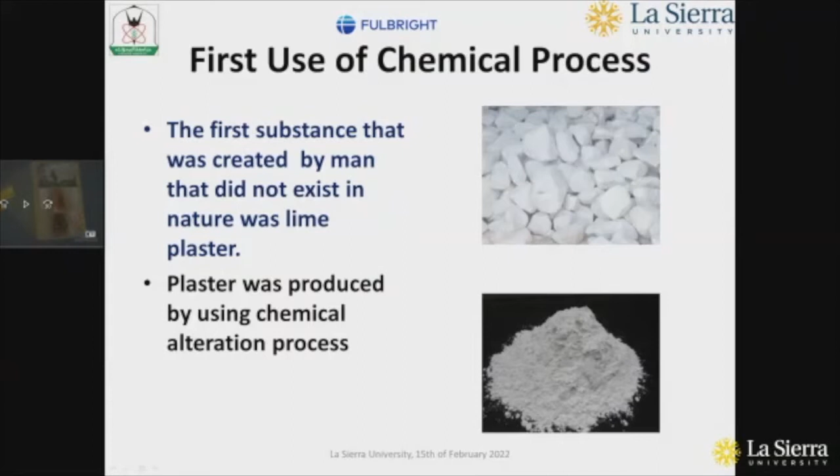We have limestone. Now, in order to transform limestone into lime plaster, this is really a complicated chemical process. So plaster was produced by using a chemical alteration process.

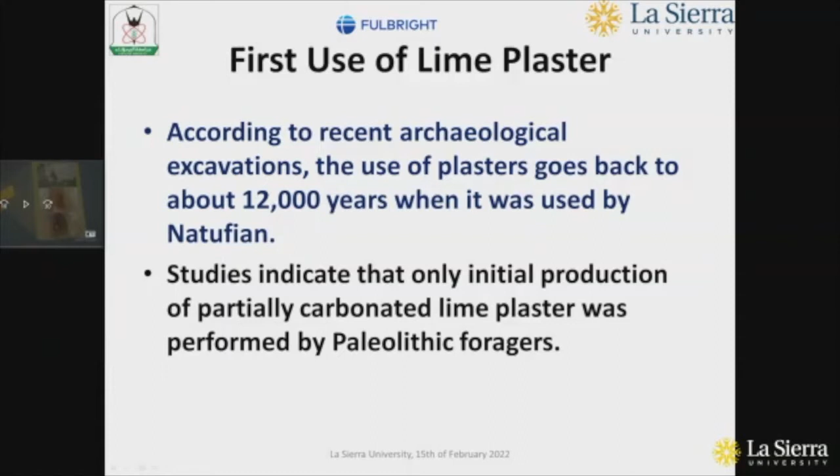So the first use of lime plaster, as reported by archaeologists, is about 12,000 years ago at some of the Natufian sites. But that was only initial, partial carbonation, not full lime plaster, on a very small scale. Now, the first large-scale lime plaster production and use was really at Ain Ghazal. Ain Ghazal is a site in Jordan.

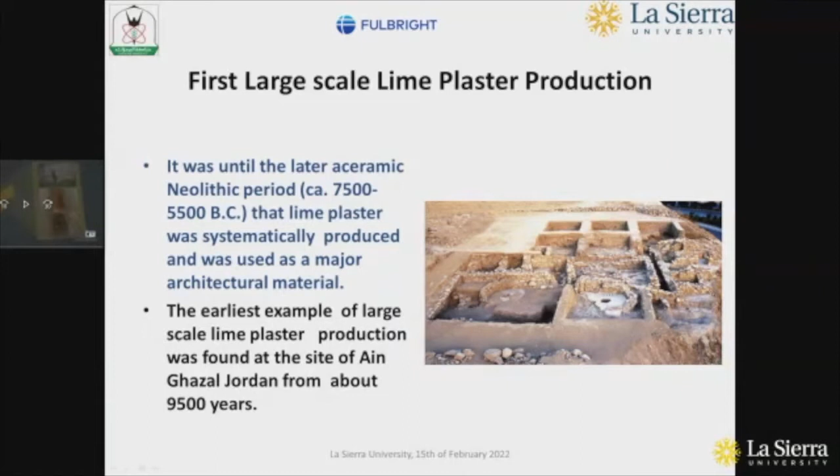So that site was extensively researched by a joint project between an American university, I think Whitman College with Gary Rollefson, and Yarmouk University under the leadership of Zeidan Kafafi. So that was about 9,000 years ago. The earliest example of large-scale lime plaster production was found at Ain Ghazal.

So they found plaster extensively used to cover floors and walls, as you will see here. So that large-scale production was not just confined to the use of plaster as an architectural material, but they used it to produce statues. Very unique statues, very famous in the world now. Ain Ghazal statues are being exhibited in different international museums like the Smithsonian Museum, the Louvre, and the Jordan Museum. We have a couple of them at Yarmouk University Museum.

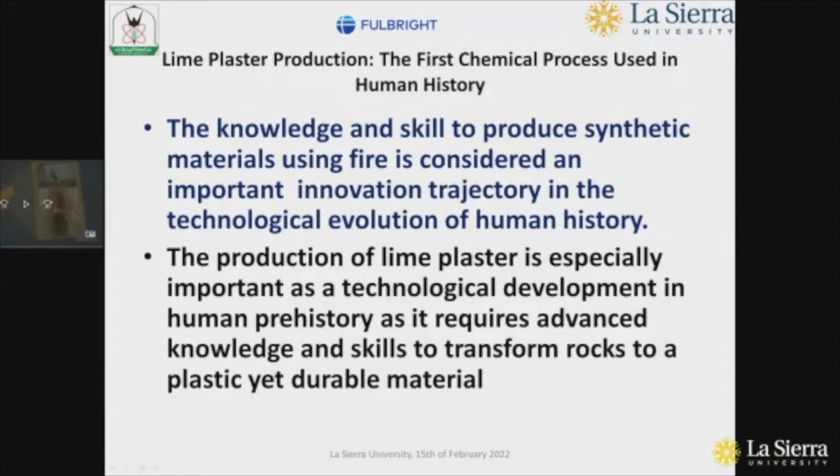So the production of lime plaster is especially important as a technological development in human prehistory. It requires advanced skills and knowledge of the nature of the materials and how you can alter and change the nature of the material by applying heat. This is what they did.

And they transform rocks to a plastic yet durable material to produce the statues. And if you just follow the chemistry of the lime production cycle, you know that these people were really advanced in their knowledge about the materials.

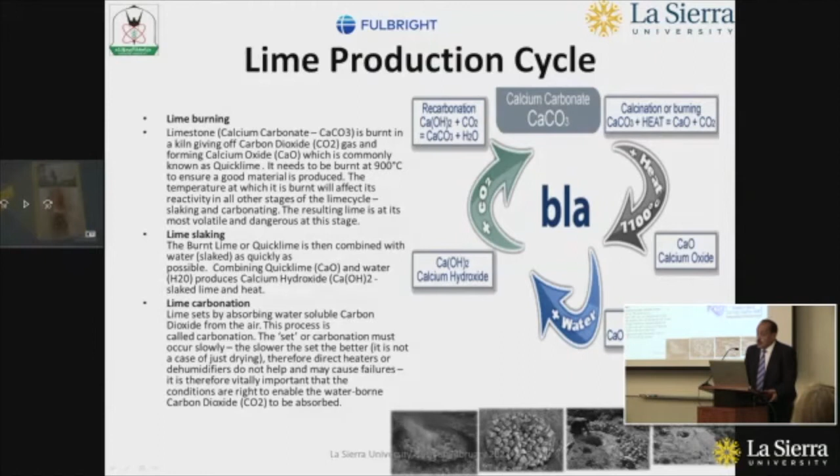So they knew that they have to decompose the calcium carbonate, which is the main chemical of the limestone, decompose it by applying heat to above 900 degrees centigrade to produce lime, calcium oxide. And when they added water to this calcium oxide, they produce what they call slaked lime, the body that they can really use to manipulate and shape.

Okay, but this also needs an extra step for setting up what we call the lime carbonation in order to come back to be a calcium carbonate again and achieve the durability. So it's a three-step process. They need to heat at a high temperature, decompose the calcium carbonate, and then add water. They know that there will be a reaction between water and lime to produce the calcium hydroxide, which is what you call the slaked lime.

And then they leave it to take CO2 from the atmosphere, from the air, in order to complete the cycle and come back to calcium carbonate. So you think that this happened 9,000 years ago at the site of Ain Ghazal. So you can imagine what level of knowledge these people had at that time.

The second innovation that I want to speak about is really what's considered now by many archaeologists and many scientists as the first industrial revolution. The first industrial revolution happened in Jordan. So what is this industrial revolution all about? It's about the transition from the Stone Age to the Metal Age.

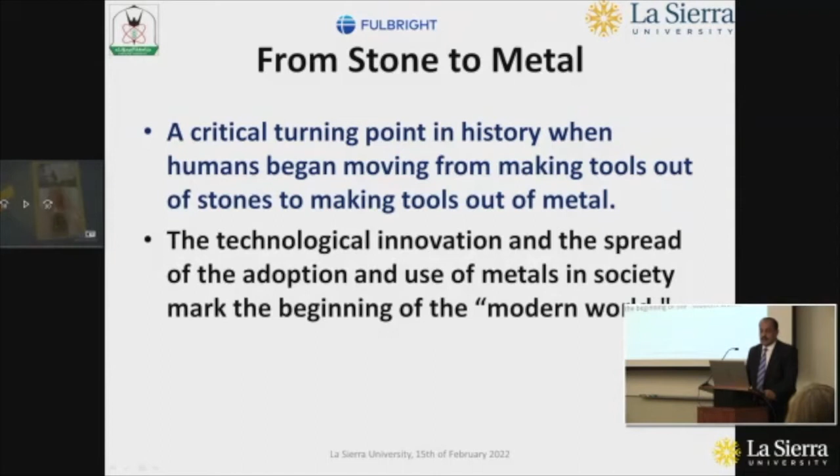What was the challenge? The challenge is that metal in general doesn't occur in nature as a free metal, except gold. Metals exist as compounds, what we call ore, which means the metal is combined with other elements. So that's totally different from the metal in terms of its chemical and mechanical properties. So the technological innovation was really to transform these ores into metals. We'll see how complicated, how sophisticated this process can be.

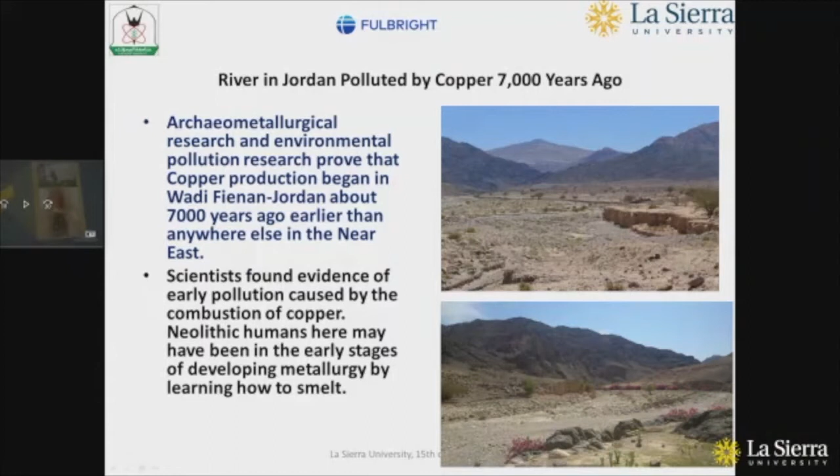Now, the earliest indication of production of copper, the first metal produced in the Metal Age, comes really from research done by a Canadian team from the University of Waterloo, who have been studying the area of Fienan in southern Jordan for about 25 years. And they discovered that this dry riverbed is contaminated with copper metal. And they used carbon-14 dates and other dating tools to estimate that this was about 7,000 years ago, at the very beginning of the Chalcolithic period, maybe even a little bit earlier.

So the scientists found this evidence of early pollution caused by combustion of copper. And we think it's an indication that copper was produced at Fienan, because although some small quantities of copper can exist in nature as native copper, these are very small, very tiny. Most copper is really man-produced by smelting from ores.

Although the name of copper, as we discussed with Doug the other day, is derived from the name of Cyprus, archaeologists believed until this discovery and other work, I will mention the research also done by other research teams who have been working in Fienan for over 30 years now, that the earliest evidence of copper smelting was from Mesopotamia. And they estimated that at about 6,000 years ago.

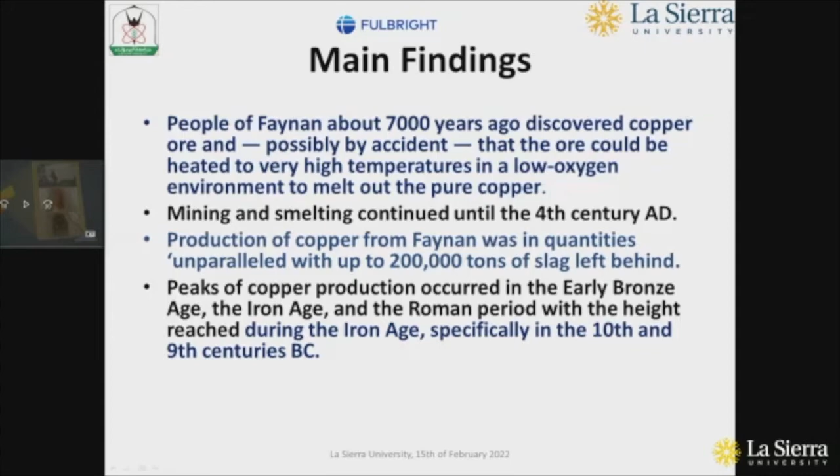And just to give a summary of what they have now, almost like a consensus on these facts, that people of Faynan about 7,000 years ago, earlier than anybody else, anywhere else, discovered copper ore, possibly by accident because of the colors. The ore could be heated to a very high temperature in a low oxygen environment to melt out pure copper. So mining and smelting continued uninterrupted until the 4th century AD. Of course, it reached some peaks during the early Bronze Age, Roman period, and particularly in the Iron Age, the 10th and 9th century BC.

Now, the indication of the scale of production of copper is really what was left behind, the slags, which are the byproduct of the smelting process. And people can really easily back calculate the amount of copper produced based on the slags. So we have slags, slag heaps, about 200,000 tons now at the site. You see the ore everywhere, the mines, and also later on in the Bronze Age, they discovered what they call a bronze factory, because they produced copper ingots and bronze at an industrial scale for export.

Just briefly to tell you what it takes to get copper from its ore. Copper ore to copper metal. This is not easy at all. This is a very sophisticated and complicated process. It's a multi-step process. We have at least 4 physical processes and at least 3 chemical processes in order to convert copper ore into copper.

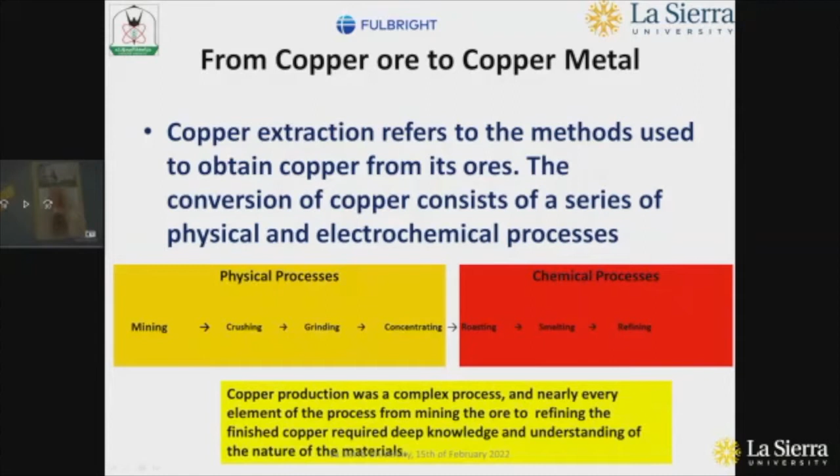They have to collect the ore from the mines. At the beginning, they can do what we call pit mining or surface mining, but later on they have to dig deep to get the ore, and then they have to do some sort of preparation by beneficiation and refining to get rid of as much gangue material and impurities as they can. A lot of it, because even the best grade of copper ore can contain not more than 10 to 15% of copper.

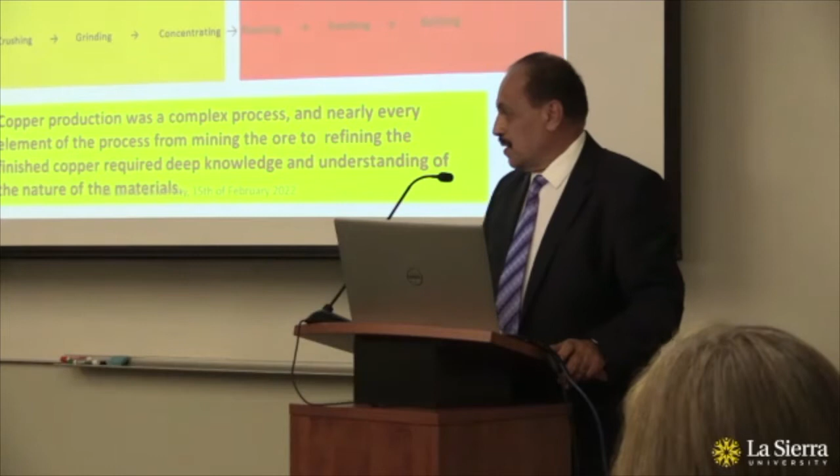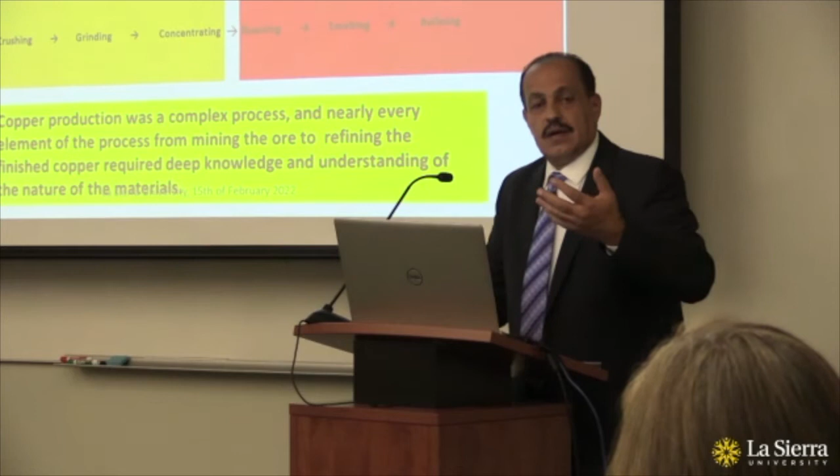But the most amazing thing is not really the physical processes or the chemical processes, especially the smelting. And people sometimes mix up smelting and melting. So melting is a very simple process of converting a solid substance into liquid. Smelting is something else. It's an electrochemical process. It's a reduction. You apply temperature, and you have to have a reducing agent in the atmosphere in order for this process to be completed.

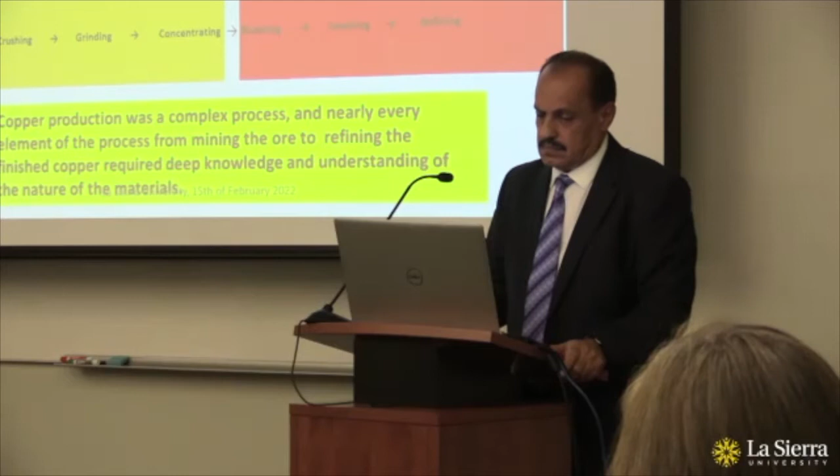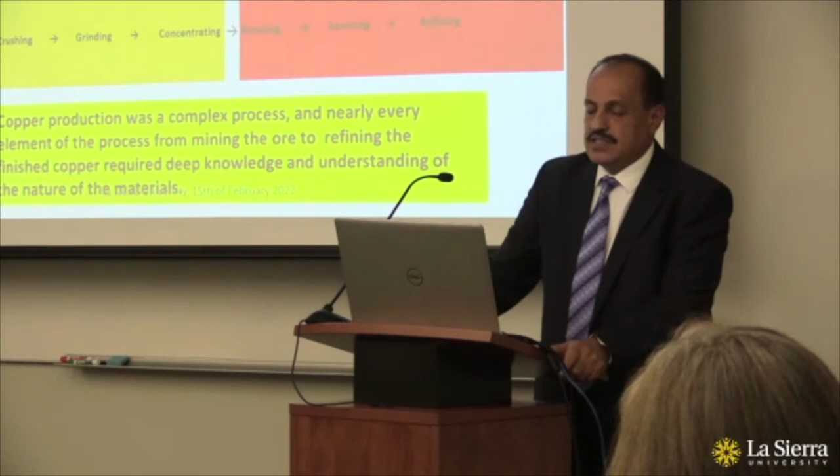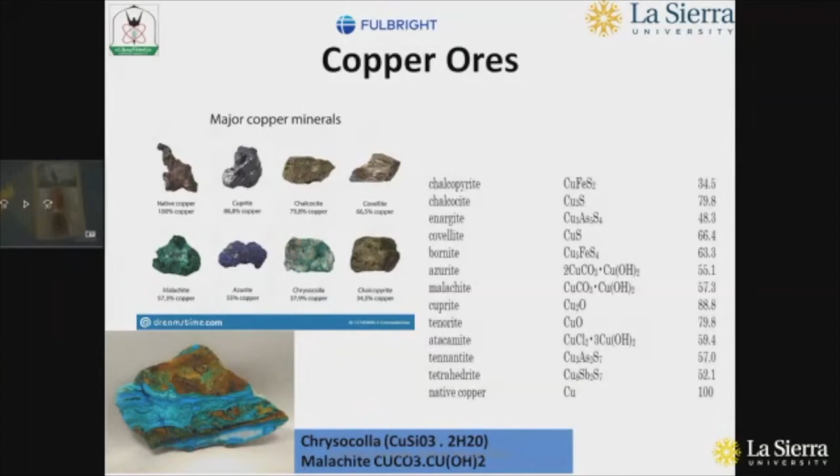So copper production was really a complex process. Nearly every element of the process, from mining the ore to refining the finished copper, required deep knowledge and understanding of the nature of the material. We'll just focus on the smelting. So copper exists in nature, as I mentioned, as copper ores, like these compounds. And in Faynan, the most predominant ore is chrysocolla, the copper silicates, and malachite, copper carbonate, with some chalcopyrite, which is the copper iron sulfide. That's very hard to work, really. Very hard to get metal copper from chalcopyrite, but they did it also.

So smelting is a chemical process. In order to extract copper from its ore, you need certain conditions, certain requirements. The first one is the very high temperature. And we'll talk about the temperature and how they control and manage the temperature. And then they also need to have a reducing atmosphere. And also, they need an extra, very sophisticated thing for purification. I will talk about that later.

So if you just look at the chemical equation, this is malachite. Under heat, in roasting, in an open pit, you can do this. So you get copper oxide. In order to take the oxygen out from the copper oxide, this is a very strong bond, you need a very high temperature, and you need a reducing agent, which is carbon or carbon monoxide. So this journey from ore to metal is a very sophisticated and very complicated one.

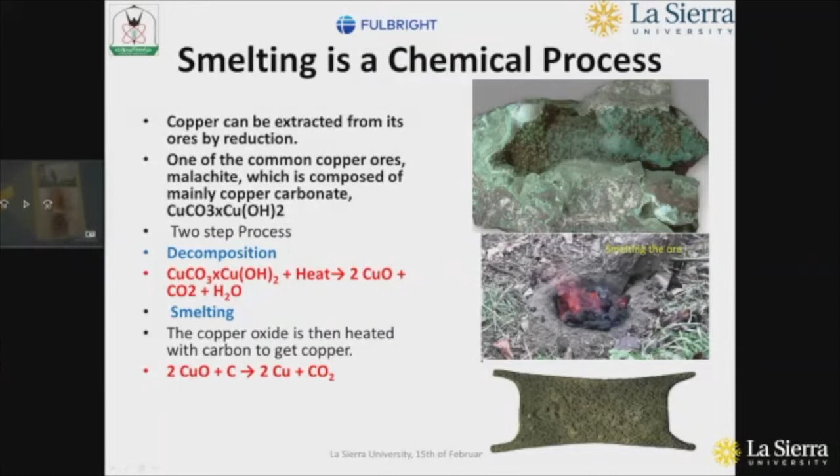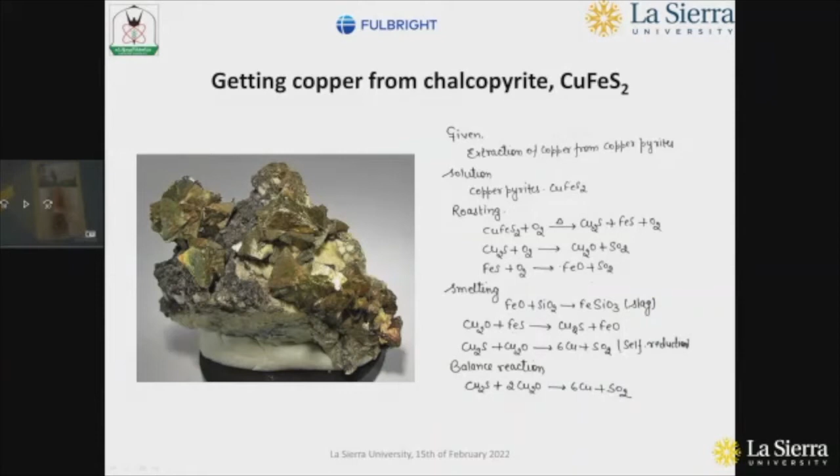If it is chalcopyrite, you go through a series of complicated chemical reactions before you can get copper. I'm not going into the chemistry of the reduction at this stage, but some people thought that smelting might have been discovered by accident, maybe began as a result of accidental cooking of metal ore in a campfire.

Is that an accepted argument? No way, because with that sort of fire, you cannot get the high temperature you need for the roasting and the smelting. And also in the presence of oxygen, even if you got a temperature of 2000, you end up with nothing because of the presence of oxygen. You need a reducing agent. You need a very saturated atmosphere of a reducing agent, in this case, the carbon.

So most probably, though it's not yet a fact, smelting was discovered for the first time in a pottery kiln. Because in a pottery kiln, temperature might get really high. And sometimes in some corners of that kiln, if you get an ore, you might get a localized reducing atmosphere.

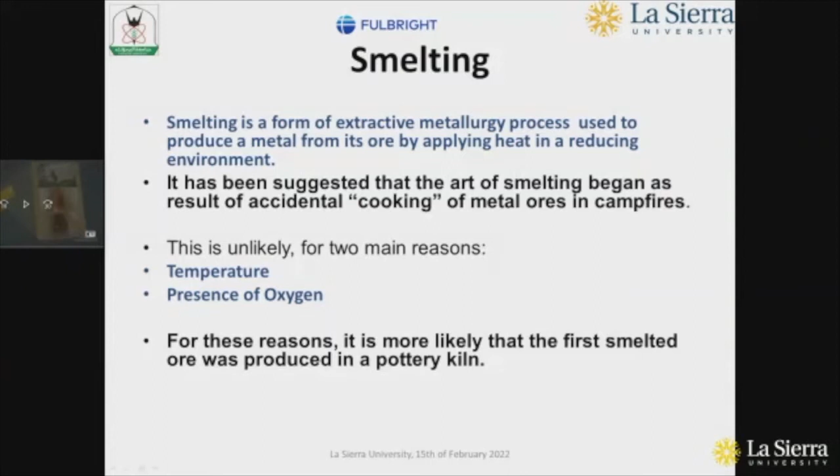So the requirement of smelting of copper is a very high temperature. You need at least 1200 degrees centigrade. That's above 2000 Fahrenheit. You need a chemical reducing agent to decompose the ore. And here they have to use a fuel that can give them the very hot temperature and the reducing agent at the same time. So they use charcoal instead of wood.

And you need what we call the flux. What's a flux? The fluxing is, for me, still puzzling how they really found out about this flux. Because if you do the reduction, and you have a furnace, temperature, reducing agent, everything, you end up with a very complicated mixture of molten copper, but with a lot of gangue material fused to the copper. And this cannot be separated. No way. So you got the copper, yes, but the copper is not obtainable in this case.

They really found, I don't know how, that if they added what they call a flux, which is an external substance, to the furnace or to the pit. At the beginning, they used a pit furnace. In this case, it's an iron oxide. It can react with the silica and form a molten phase that can be easily separated. So this is another chemical process.

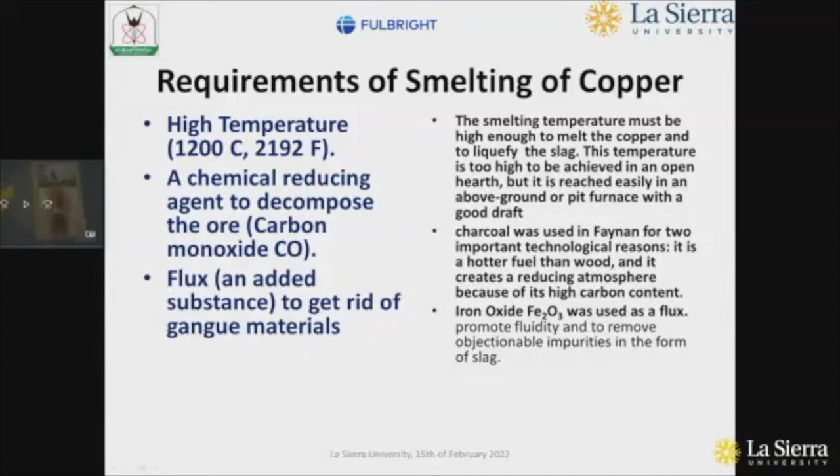So look, they have to manage the temperature, and 1200 is not an easy temperature to manage. You need a special construction of the pit furnace that they used at the beginning, with a good air draft. And also, they need to control the ore charcoal ratio in order to maintain the reducing atmosphere in the kiln. And above that, they also have to use the flux. These are the three basic elements needed for a successful smelting process.

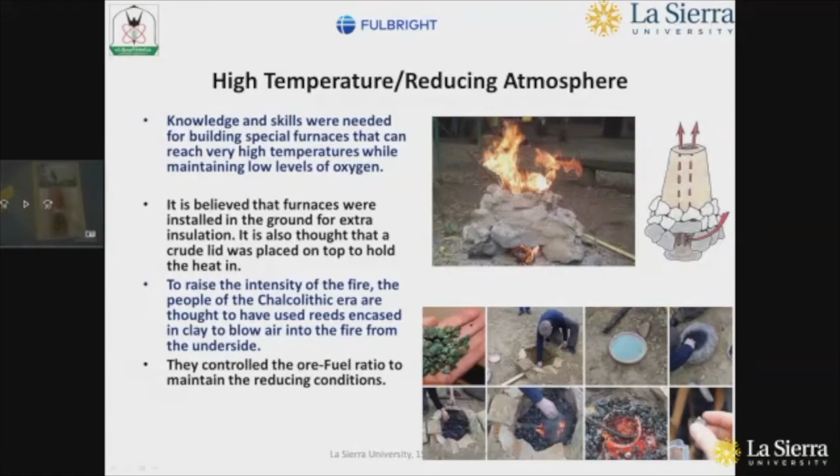How these people managed 7,000 years ago to have all that knowledge is really very puzzling. There are so many theories about how it might really happen, but still they are theories, not facts.

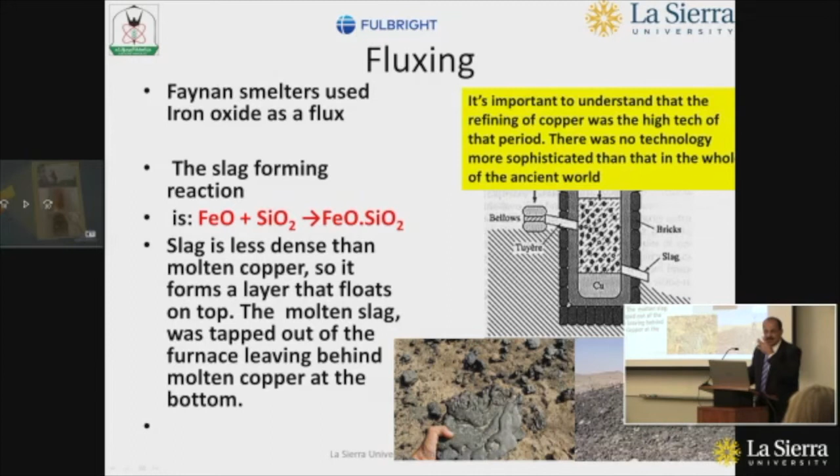So look at the ingenuity of the fluxing process. This is the copper. When you get the molten copper, it's at the bottom, okay? Now with the addition of the flux, you get this molten phase, and it is less dense than the copper, so it floats above. And then they open the vent to tap the slag out of the furnace. And we have here, as you see, the running slag. There are some what we call cake slags, maybe from a small scale of copper production, but with a large scale, they really needed this process, the flux. And most of the slags are really these tap slags.

The smelting of copper is really a very challenging chemical process, and the refining was the high tech of that period. There was no technology more sophisticated than that in the whole of the ancient world at that time. Nothing like that. They had to discover the flux. They had to select the flux, the chemical substance that can do the trick: react and create that phase which is less dense than the copper itself, so they can be separated.

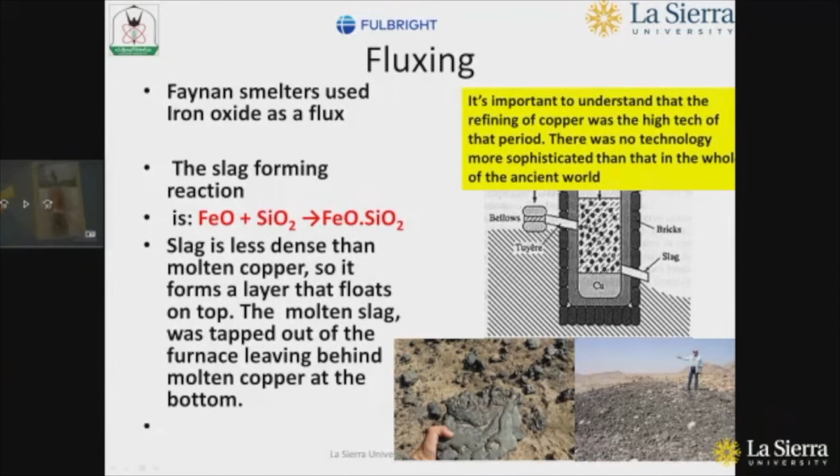So I think it deserves to be called an industrial revolution, because that process changed the course of history. From the Stone Age, we entered into the Metal Age, the Bronze Age.

The third area of innovation that I want to speak about is the water engineering and management systems. And here, Jordan suffers from the scarcity of water, particularly these days. We are the third most water scarce country in the world. But our ancestors managed to have a permanent supply of water, because without managing water in that way, how could we imagine all these cities and civilizations that flourished in Jordan?

So I call it creativity forced by nature. Nature was not so kind to Jordan. We have no rivers, no springs, almost no water. We have good rain this year, though. But water harvesting is really poor in Jordan. So the people who settled in Jordan were able to create for themselves a near permanent water supply in places where nature was not kind. Several sites in Jordan provide examples of this hydraulic engineering in very dry areas with very little rain.

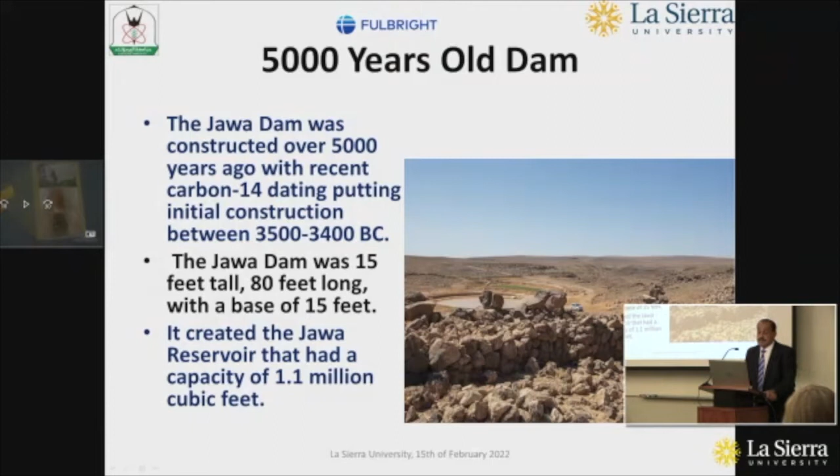So Jawa dam was constructed about 5,000 years ago. It's in the early Bronze Age almost. And that was part of an elaborate water system established in the middle of the desert. And then after this system, they managed to have a city in the middle of the desert with about 2,000 inhabitants. And the relics of the dam still exist until today. Okay.

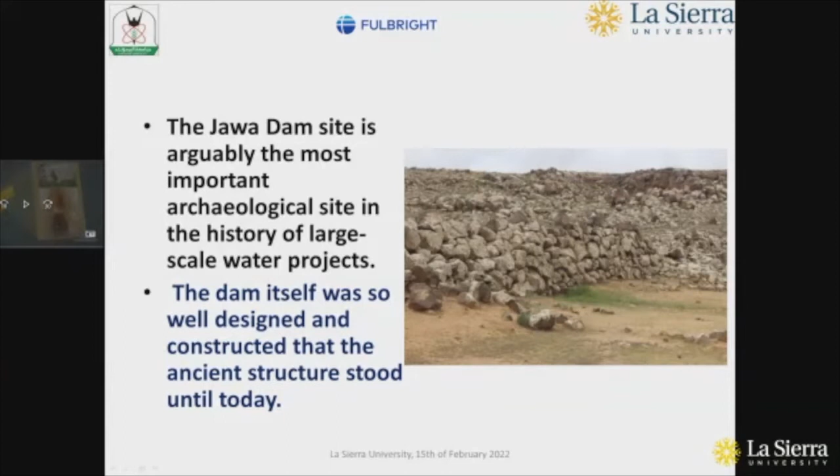Jawa dam site is arguably the most important archaeological site in the history of large-scale water projects. Why is that? Why do hydrologists think that this is really an exceptional dam? Because of its age and because of something else, because of its construction technique. This dam was built using modern-day dam technology and engineering.

The design and construction of the dam is really amazing. If you look to the design and the structure, you will see that this is a dam built with a great knowledge of especially the water back pressure. This is an important aspect of dam building and dam engineering. So they built it of 2 dry masonry walls, enclosed an earth core of about 2 meters. And additionally, an impervious blanket was provided in the form of an upstream fill.

So they created a stable structure and they protected the dam from the dangers of water back pressure, which the hydrologists, not myself, because I'm not an expert in this field, think is a precautionary measure that was reinvented only in modern times. Most of the known dam examples are of simple gravity dams. This is the only one with that sort of sophisticated dam engineering.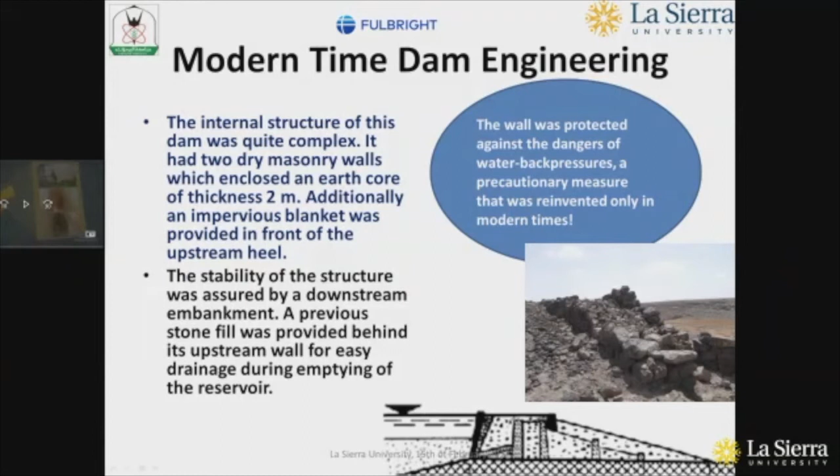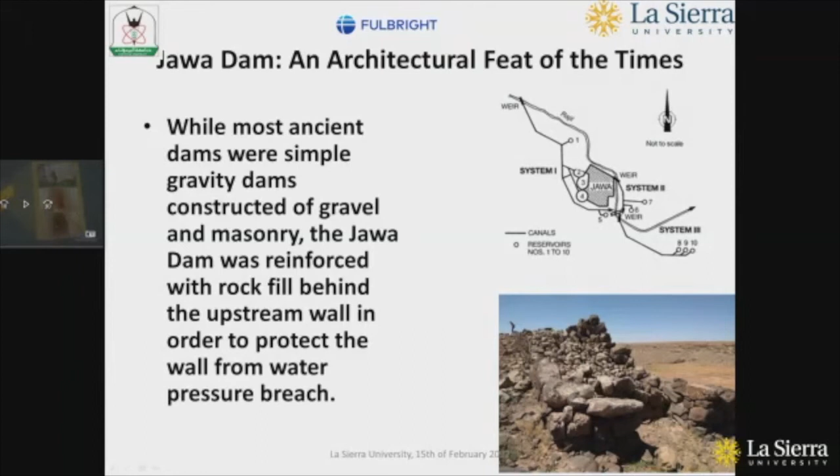Now, for unexplained reasons, this miraculous desert city collapsed as swiftly maybe as it rose. It might even have become a victim of its own success, because archaeologists think so many people put a lot of pressure on the system that it collapsed altogether, because the city lived for some time and then was completely deserted all of a sudden. So again, there are some explanations of the construction design and the engineering of the dam.

The second example is the sophisticated water technology of the ancient Nabateans. Petra, that's maybe the most famous water system in the world. You all know about the mysterious Nabateans and their very powerful and flourishing kingdom. For about 600 years, the Nabateans managed to establish a very powerful kingdom, and their capital Petra was the hub of trade for caravan routes.

Because of many values associated with Petra, technological and otherwise, human values, Petra was inscribed in the World Heritage List in 1984, 1985, and then was chosen one of the new 7 wonders of the world in 2007. We can talk about Petra, a city altogether cut in rock, from rock. We can talk about the Nabatean trade, about many aspects of the Nabatean civilization. For example, their eggshell pottery was really quite an innovation as well. But today I'll talk only about the water management technology.

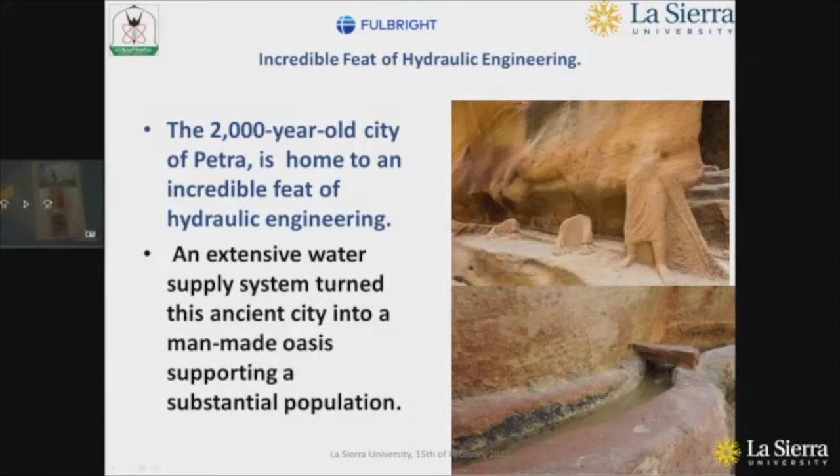Petra is home to an incredible feat of hydraulic engineering. You can see this extensive water supply system, management system, and distribution system everywhere.

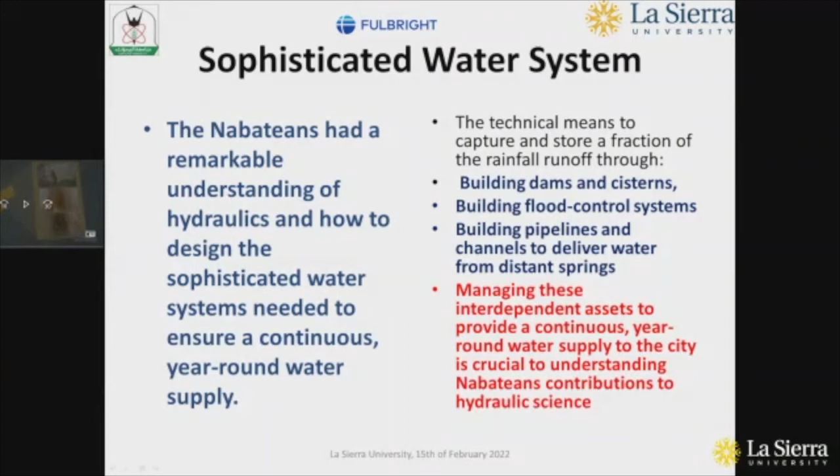I'll show you some of the elements. Based on the analysis of left structures, we think the Nabateans had a remarkable understanding of hydraulics, how to design sophisticated water systems, how to build dams and cisterns, a system that contained many elements, building flood control systems, pipelines, and channels. Managing all these interdependent elements to provide a continuous year-round water supply to the city is crucial for understanding how sophisticated and advanced these people were in water management and hydraulics.

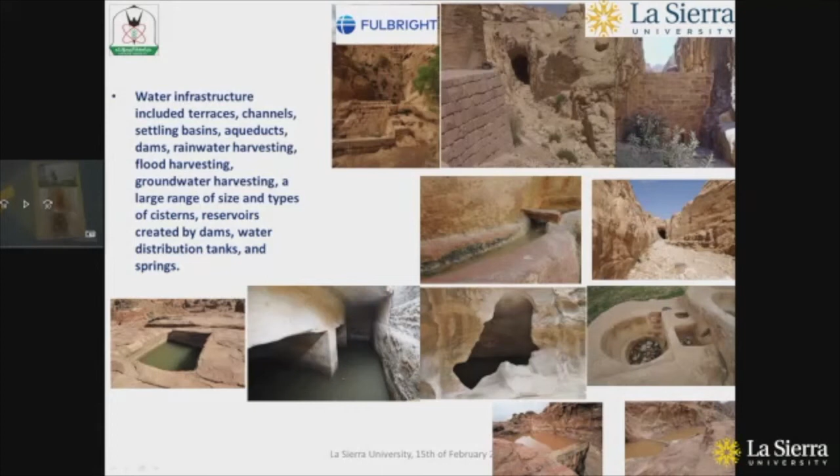So if you visit Petra, you can look at some of the remains of this water infrastructure system: terraces, channels, settling basins, aqueducts, dams, rainwater harvesting, flood harvesting, groundwater harvesting systems, a large range of size and types of cisterns, reservoirs, and many other elements. The channel system and the pipelines they created for distribution, that's another amazing thing.

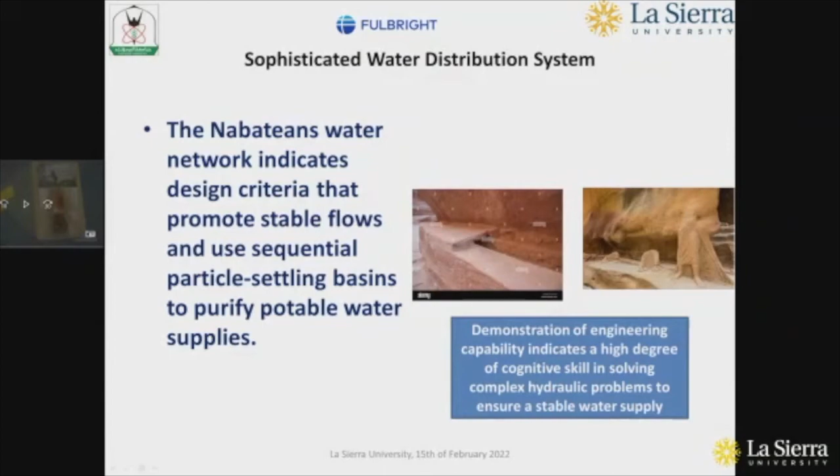They designed a system that maintained stable flows of water, using sequential particle settling basins to purify potable water supplies. They applied sophisticated knowledge to solve complex hydraulic problems, especially related to controlling the flow and the carrying capacity of their system, especially the pipelines. That required very meticulous work and accurate calculations.

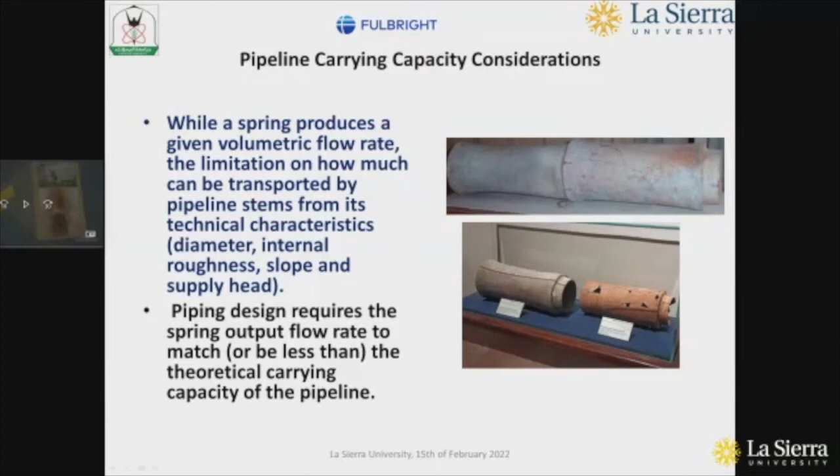If you go see some of these pipelines, they look like they were produced today. The ingenuity of the system is in the design, the diameter. They calculated everything: the water flow, the internal roughness, diameter, slope, and many other parameters and variables they had to control in order to make that design, especially to calculate and manage the carrying capacity of the system.

With the water scarcity and the desert environment in which the kingdom was located, it seems only logical that the Nabateans would be parsimonious with their precious water resources. By contrast, archaeological excavations and studies revealed several examples of extravagant use of water in the city. They had swimming pools, gardens, and water available for domestic use, but also for recreational use.

The third and last example I will present is the Gadara Aqueduct, the ancient world's longest water aqueduct system. What is the Gadara Aqueduct? This is a tunneling aqueduct system that was built to supply water to the Decapolis region, the League of 10 cities, Greek-Roman cities, 7 of which are in present-day Jordan. Because of the scarcity of water, they built that system to bring water from Syria to Jordan.

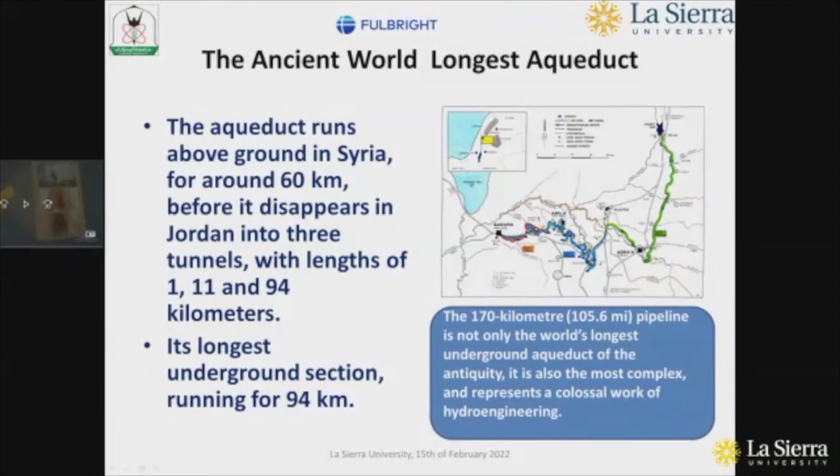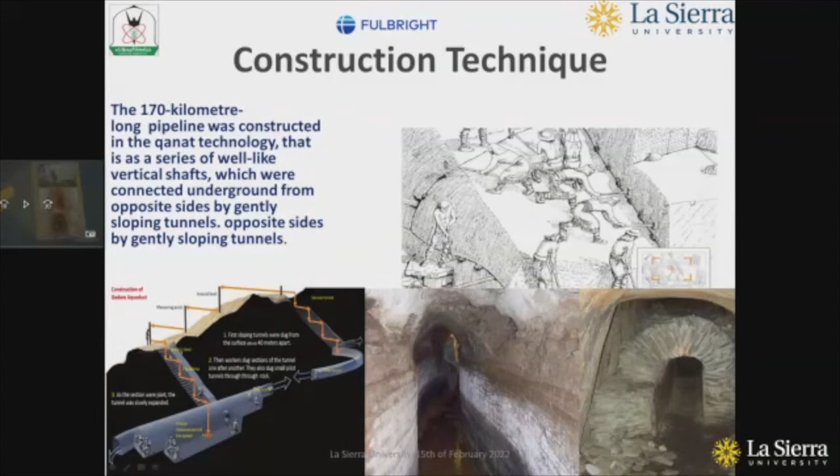This 170-kilometer pipeline was constructed using what we call Qanat technology, the technology used to build this amazing system. I'll show you a 2-minute video at the end of this presentation explaining this Qanat technology, how they managed to dig vertical shafts and connect them with horizontal tunnels on a slope, and how they managed to transport water that entire distance using gravity alone, with no water pumps, nothing.

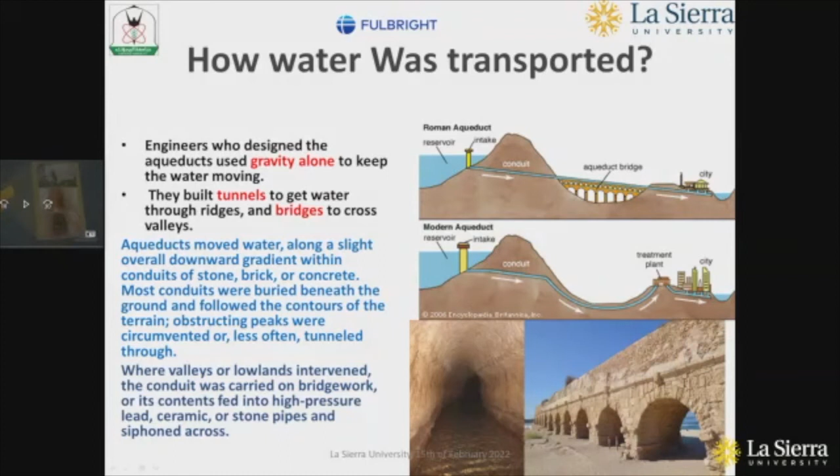They managed this through a very well-articulated and well-designed system, overcoming difficult terrain, valleys, and mountains. They built a system that ensured a steady and easy flow of water. When they faced lowland, they intervened with conduits. Sometimes they carried their channel system on bridges, and sometimes they built tunnels, combining many elements together so the water could run smoothly by gravity alone. There's a lot of engineering and calculation involved here, especially regarding slope and water pressure. We could really give an hour-long presentation on that system.

I will show you this video. Will you drag it here?

Jordan. Enlarge it here. Decapolis was a group of 10 cities on the eastern frontier of the Roman Empire, where Jordan is today, and was founded by the Roman general Pompey in 64 BC.

Gadara, a city of the Decapolis, was supplied with water through an ingenious Roman network of underground channels, discovered as late as 2004 by Matthias Döring, a German hydromechanics professor.

The network included tunnels distributing water to private and public buildings, such as public baths and luxurious nymphaeums, monuments to the spirits of spring water. In addition, fresh water was supplied to the inhabitants of the ancient city of Gadara, near today's Umm Qais, with its 50,000 population.

With a length of approximately 170 kilometers, this colossal network of water channels exceeded by more than 9 times the length of the Bologna Channel, which is only 19 kilometers long, and which was until recently the longest ancient aqueduct known. Partly following the course of an older Hellenistic aqueduct, work started after a visit of Emperor Hadrian in 129 or 130 AD. The aqueduct was constructed using Qanat technology.